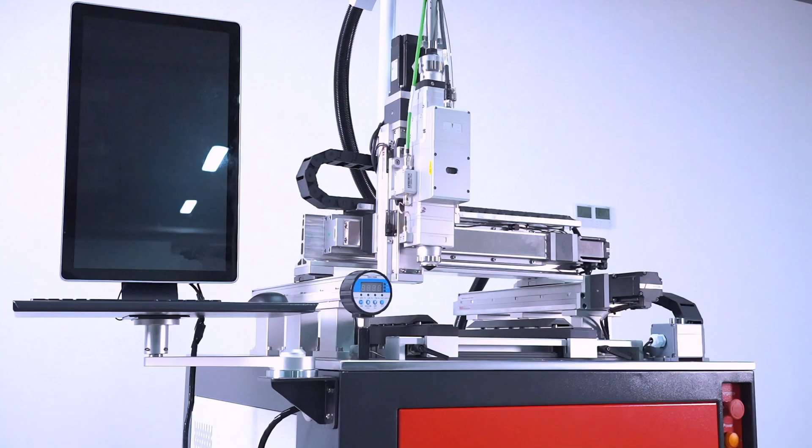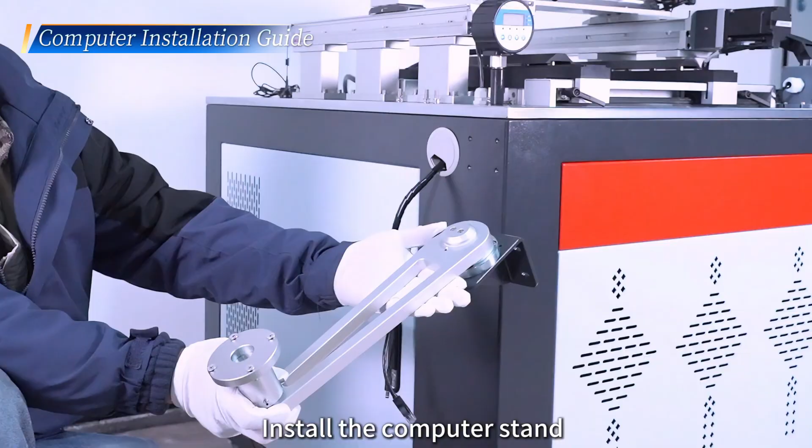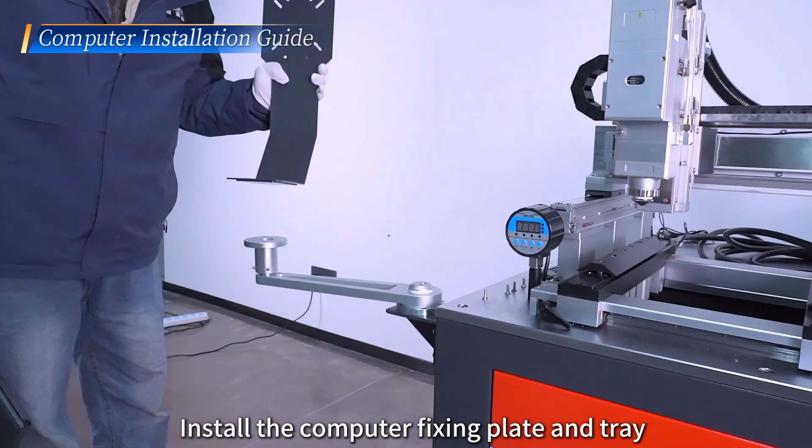Remove the 4 screws on the left side of the cutting machine. Install the computer stand. Remove the tray on the computer stand and fix the screws. Install the computer fixing plate and tray.

Plug in the remote control antenna. Plug in the wireless mouse receiver. Plug in the network cable. Plug in the computer power cord. Fix the computer on the fixing plate.

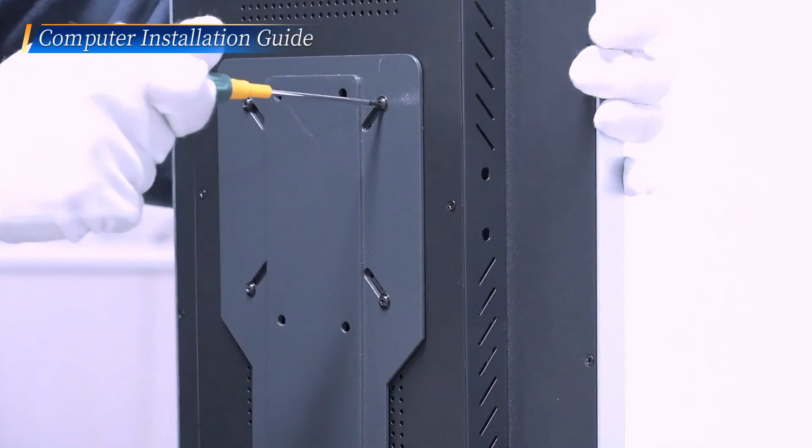Put the remote control antenna on the computer fixing plate. Installation completed.

Open the water inlet cap. Add tap water to the junction of yellow and green. Close the water inlet cap.

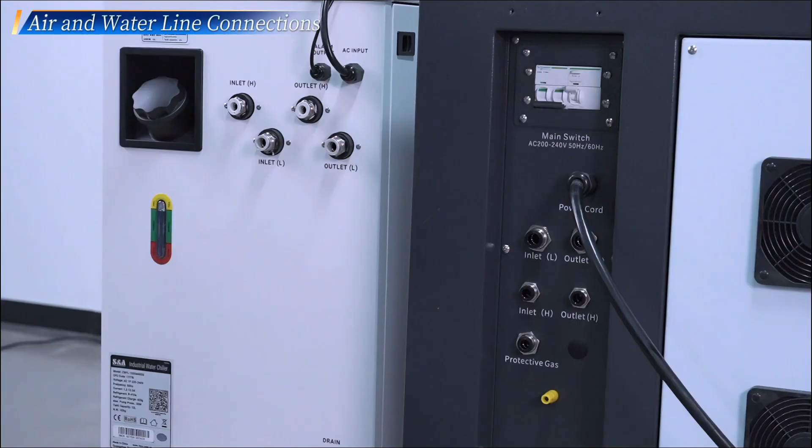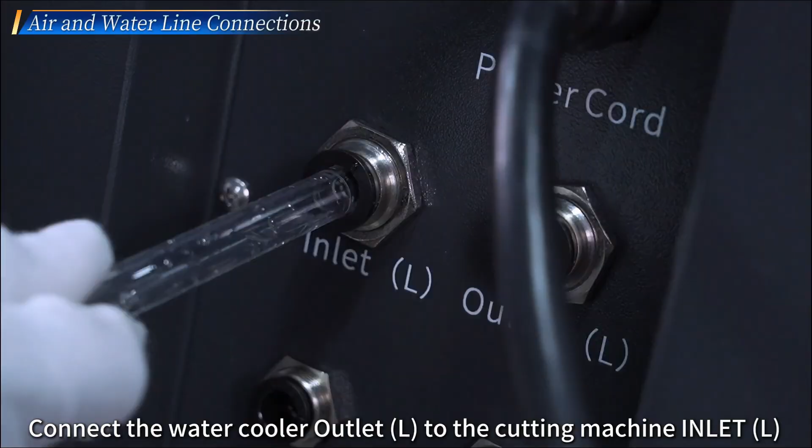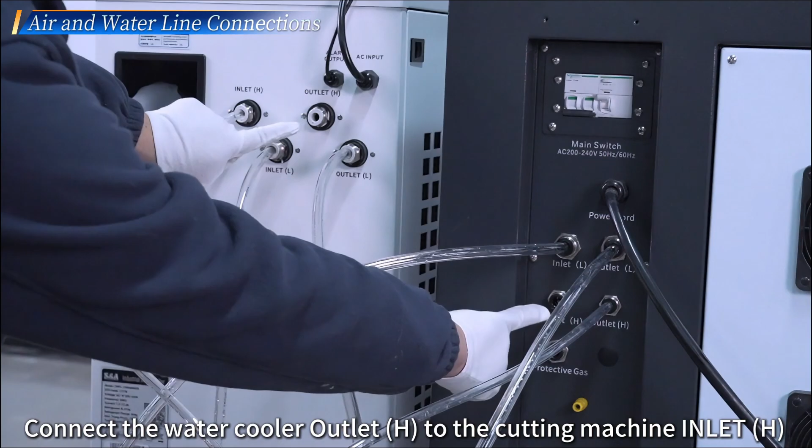Connect the water cooler inlet L to the cutting machine outlet L. Connect the water cooler outlet L to the cutting machine inlet L. Connect the water cooler inlet H to the cutting machine outlet H. Connect the water cooler outlet H to the cutting machine inlet H.

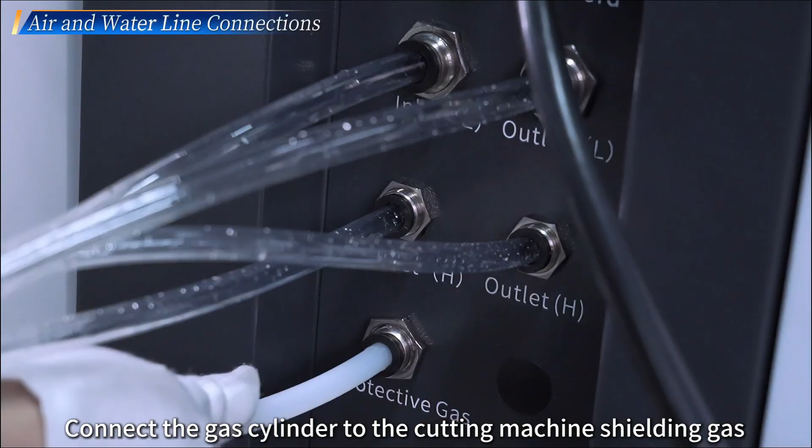Connect the gas cylinder to the cutting machine shielding gas. Unscrew the gas cylinder valve and adjust the gas pressure to about 1 megapascal.

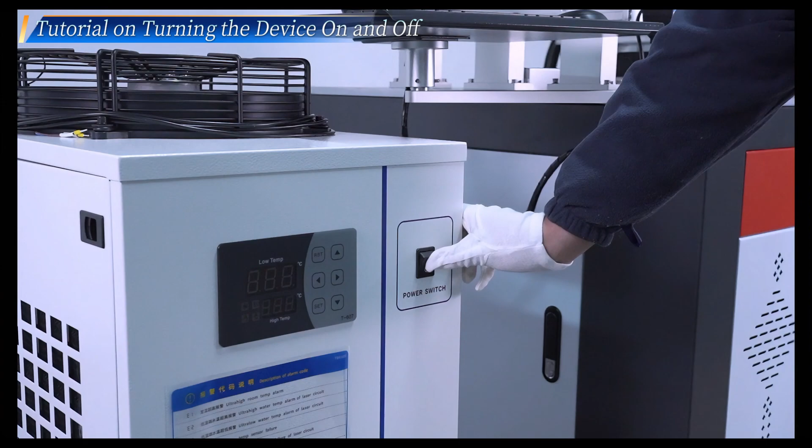Connect the power cord according to the voltage requirements and turn on the main switch. Turn on the water cooler switch. Wait for the water temperature to exceed 22 degrees centigrade. Turn on the emergency stop switch. Turn on the key switch.

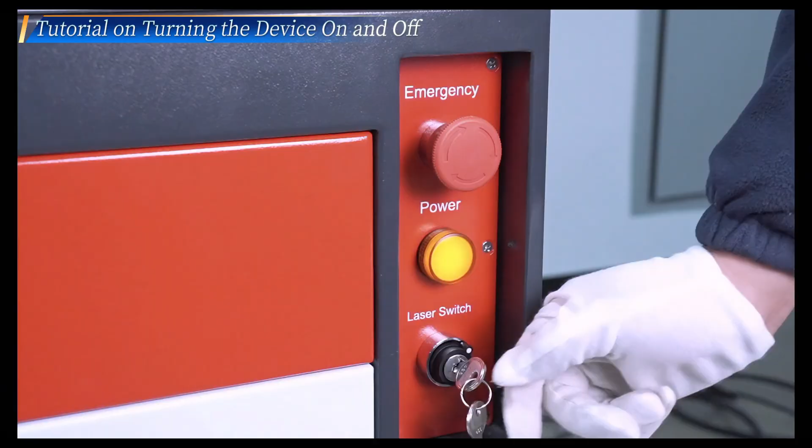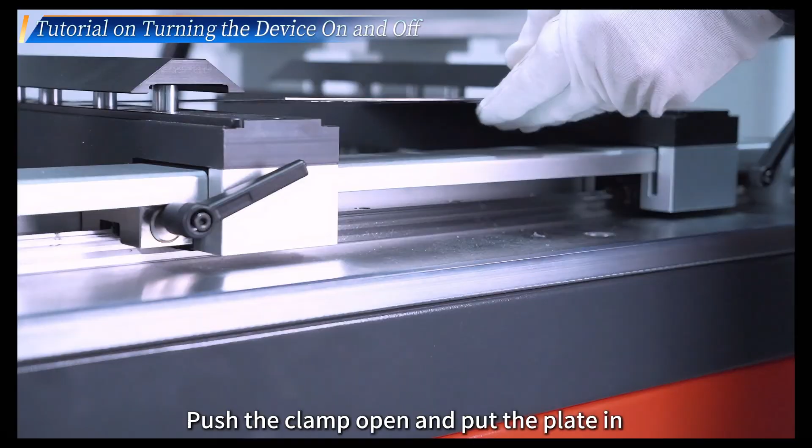Press the clamp switch to open the clamp. Push the clamp open and put the plate in. Press the clamp switch again to clamp the clamp. Tighten the fixing clip to fix the clamp.

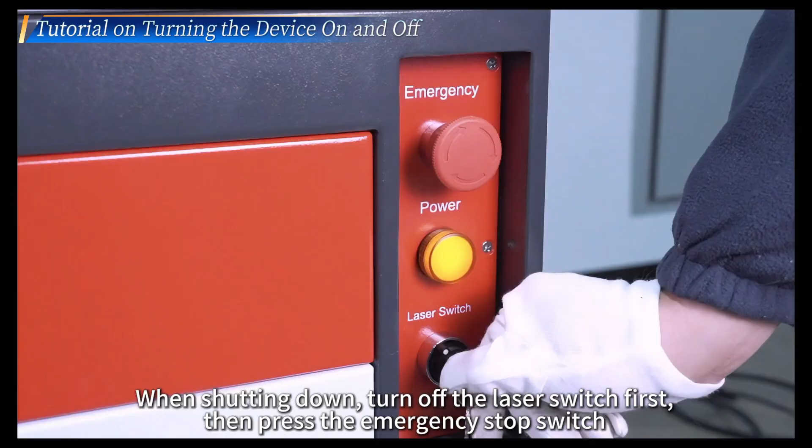When shutting down, turn off the laser switch first, then press the emergency stop switch. Then turn off the computer. Finally, turn off the main switch.

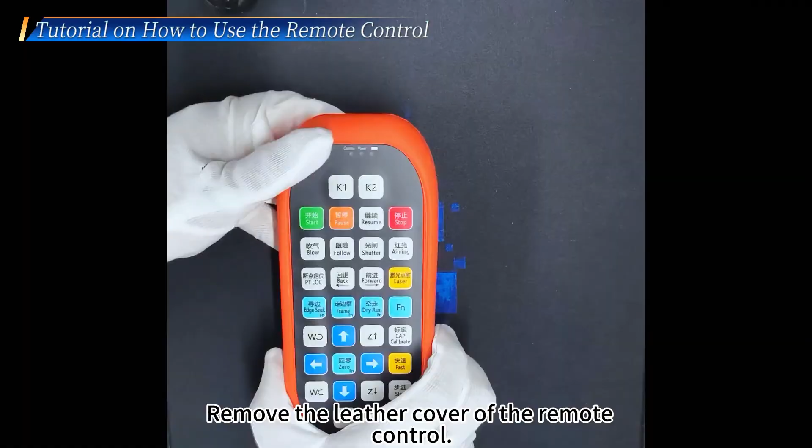Remove the leather cover of the remote control. Loosen the 2 screws on the back of the remote control. Open the battery cover. Install the battery. Cover the cover.

Tighten the 2 screws on the cover. Install the leather cover. Turn on the switch on the side of the remote control.

Click the blue up or down arrow and the cutting head starts to move forward and backward. Click the blue left or right arrow and the cutting head starts to move left and right. Press fast and press one of the blue up, down, left and right arrows at the same time. The cutting head can move faster in one direction.

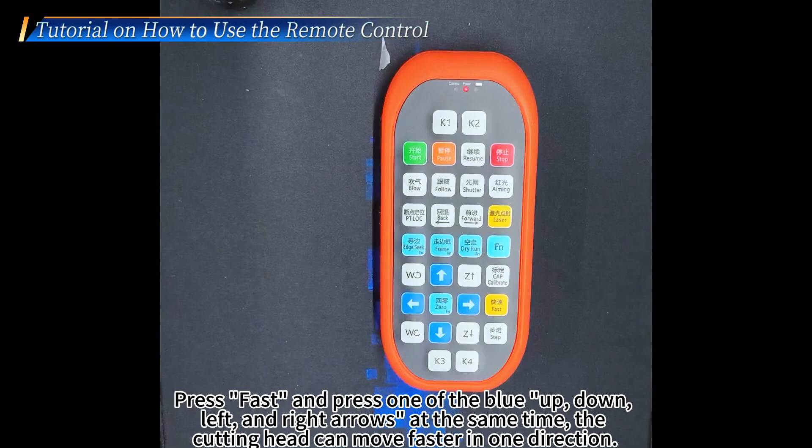Press Fn and press frame at the same time. The cutting head starts to move along the maximum border of the cutting pattern. Press Fn and press dry run at the same time. The cutting head starts to move along the outline of the cutting pattern.

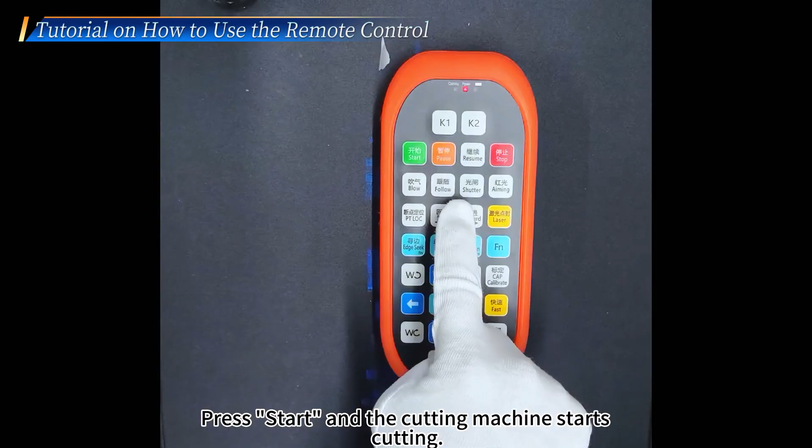Press start and the cutting machine starts cutting. Press pause and the cutting machine pauses cutting. Press resume and the cutting machine continues the original work. Press stop to stop the current cutting. Press blow to blow air manually.

Press shutter to open the laser shutter. Open the shutter before cutting. Press the yellow laser to emit laser. Press cap calibrate to calibrate the cutting head.

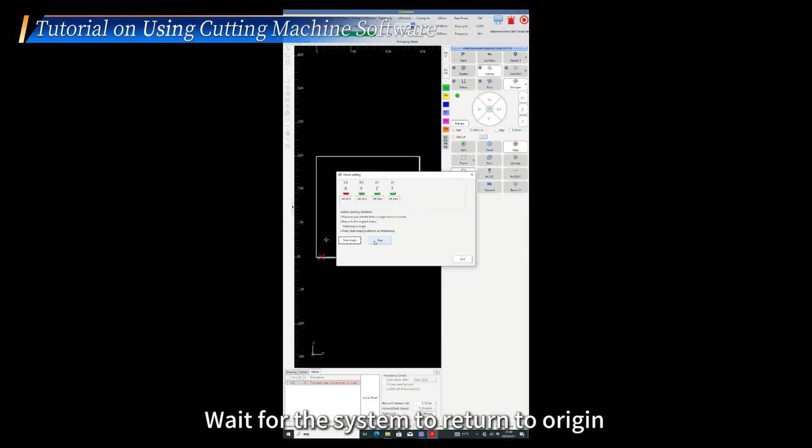Click File. Click Open. Select the file to be cut. Click Common. Click Size. Enter the required size. Click OK.

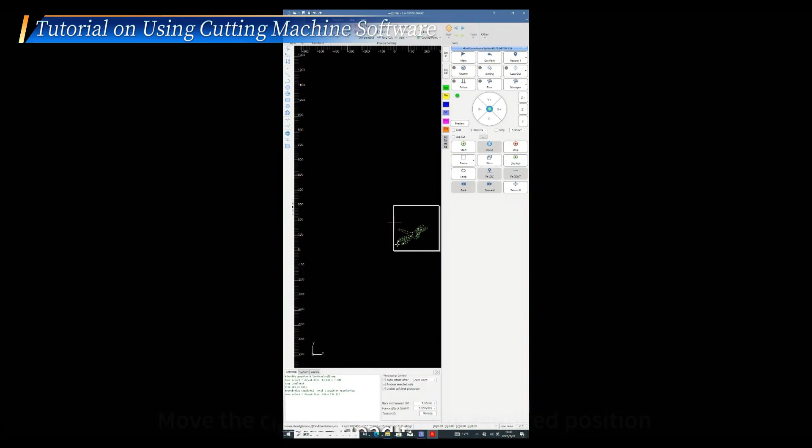Drag the graphic into the cutting range. Move the cutting head to the required position. Adjust the cutting head to within 3 cm above the workpiece.

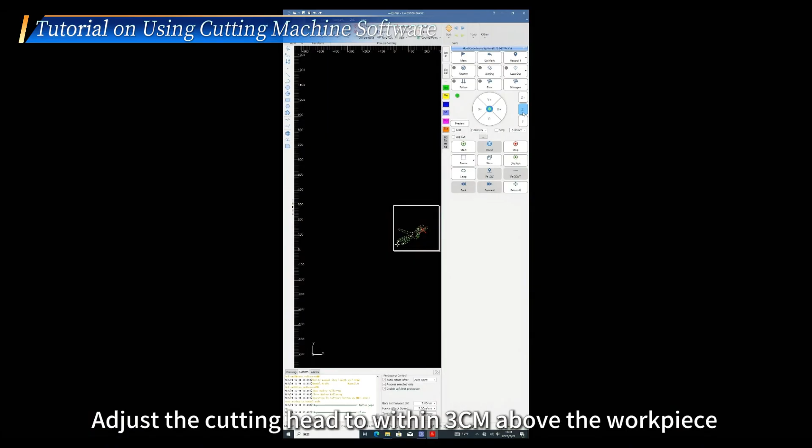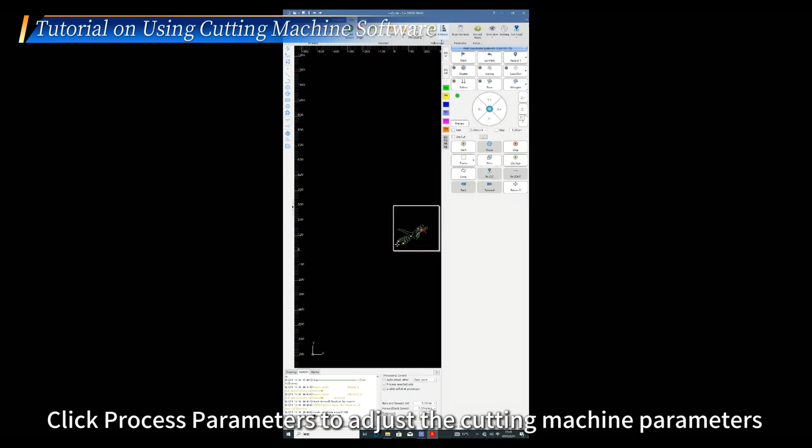Click CNC. Click Calibrate. Click Start Calibration. Wait for calibration to complete. Click Exit. Click Process Parameters to adjust the cutting machine parameters. Click OK. Click Start to start cutting.